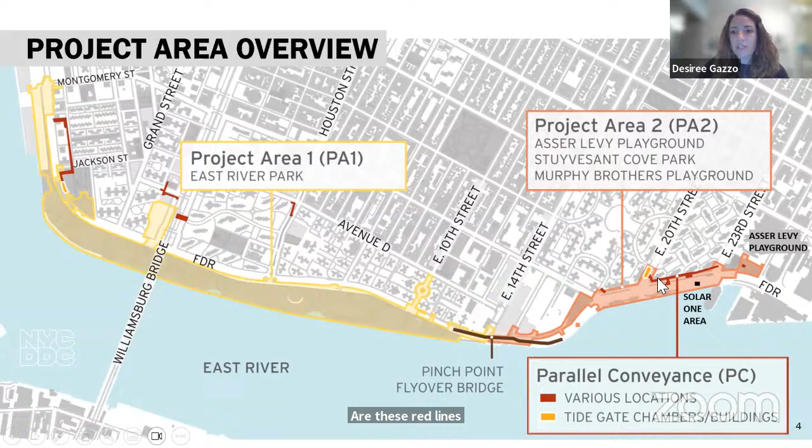Really quickly, because we might have some new folks in the room: the Eastside Coastal Resiliency Project is broken out into 3 projects. Project Area 1 is south of East 14th Street to Montgomery Street. Project Area 2, which CB6 lies in, is north of East 14th Street to about East 25th Street, and has Murphy Brothers Playground, Stuyvesant Cove Park, and Asser Levy Playground. Parallel conveyance are these red lines that run through the entirety of the project, which we'll talk about a little bit later.

So for an overview of the 3 contracts, this is our typical slide that we show here. For Project Area 1, the East River Park is closed south of Houston Street. There's a greenway closure to East 10th Street, north to East 10th Street, and a portion of Corlears Hook Park is closed. The Corlears Hook pedestrian bridge is currently closed with the temporary bridge open, but the new Corlears Hook bridge is being assembled on site. And we just opened the Delancey Street Bridge on September 2nd.

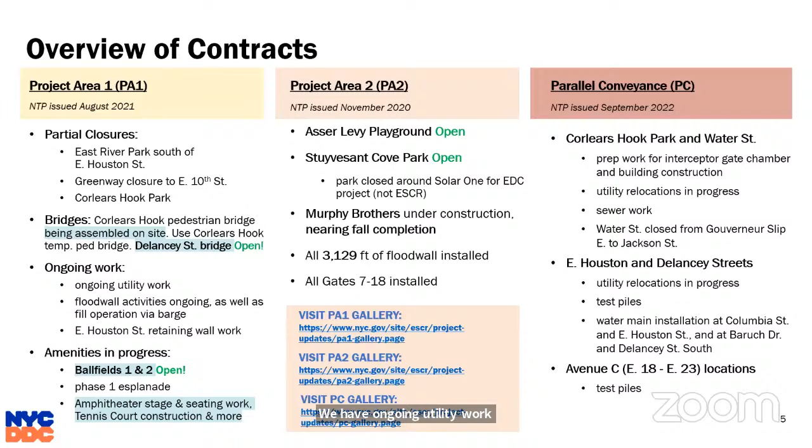We have ongoing utility work, floodwall activity work, demolition of the Esplanade and reconstruction. There's a lot of construction work happening, and then we're working to bring back a lot of new amenities. So ball fields 1 and 2, right by the Delancey Street Bridge, opened on September 2nd as well, and that's available for open play as long as there's not a permitted team there.

Currently, that is the only location that the Delancey Street Bridge goes to, so you can cross the bridge, go to the ball fields, and then you'd have to cross the bridge back out. It doesn't connect to any other outlets. We're making great progress on the amphitheater, tennis court construction, multi-use field, and more.

For Project Area 2, which you're very familiar with, Asser Levy Playground has been open. Stuyvesant Cove Park is open except for the area near Solar One where the EDC construction is. Murphy Brothers Playground, we're expecting to open in October, so we're really excited that we're delivering this project on time.

3,129 feet of flood wall has been installed, and all gates, numbered 7 through 18, have also been installed. I put the links to our gallery, our construction galleries, here. We are still in the process of updating them, so you could wait a week or so to look at them and we'll have new pictures up.

For parallel conveyance, we've broken it up into a couple of different locations. For Corlears Hook Park and Water Street area, there's a lot of prep work for the interceptor gate chamber, which we'll talk about in a couple of slides. There's also a lot of utility relocations and sewer work, especially on Water Street between Gouverneur Slip East to Jackson Street. Houston Street and Delancey Street have similar utility relocations, test piles, and water main installation. That is the bulk of this project.

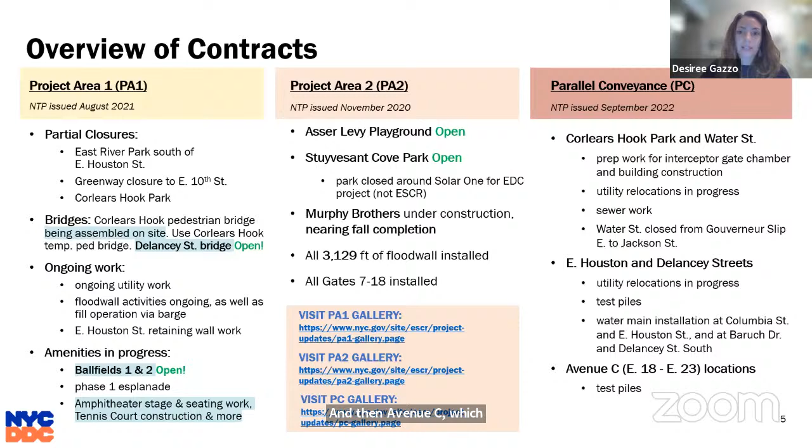Very quickly for Project Area 1, again, this is our typical slide, so it'll be up on our website if you want to go back and look at it in more detail. But it really speaks to the items that I mentioned on the previous slide.

Here at number 7 is where the Delancey Street Bridge opened, and then there's the access to ball fields 1 and 2. The northern portion of the park that connects past the Con Ed facility to Stuyvesant Cove Park is still open right now, and there is some work happening on East 10th Street. We're about to do some micro tunneling under the FDR, but then a good portion of this section of the park is closed.

Pier 42 did open in full, so that is a new resource now for the southern portion of the park.

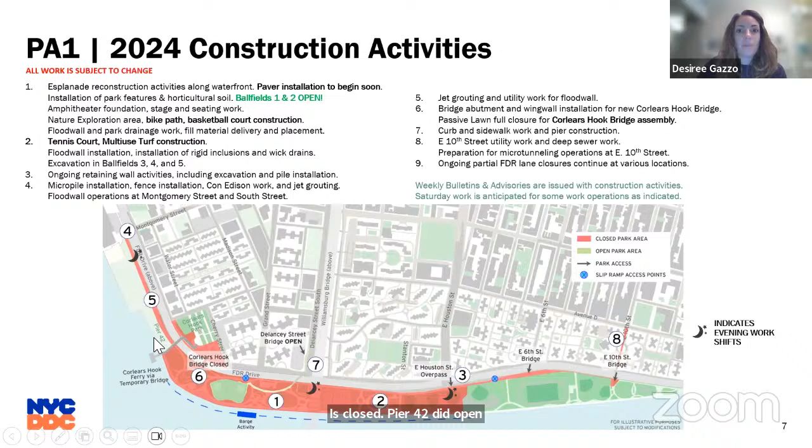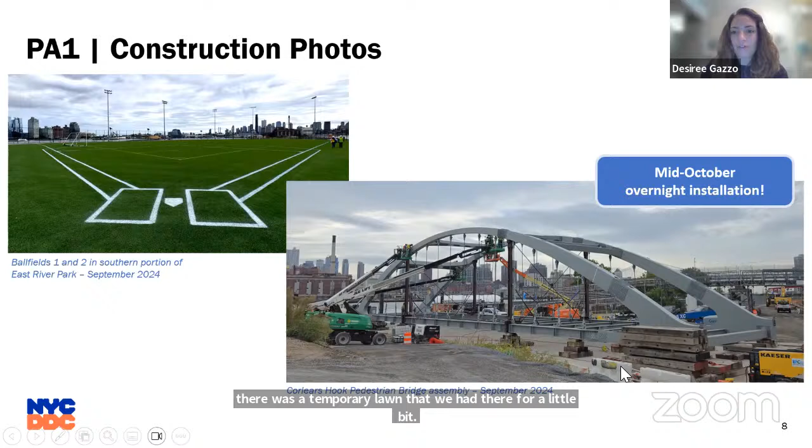At the top left is a photo of ball fields 1 and 2 when it had opened. In the bottom right is the Corlears Hook Bridge assembly, being assembled on site at East River Park, around where the compost facility used to be and where we had a temporary lawn for a while. That's now the staging area — it was for the Delancey Street Bridge, and now it's for the Corlears Hook Bridge.

We've been getting some questions about when the future amenities are going to open, and we're looking to put out a schedule as soon as we get a better idea of that.

For East 10th Street, again, we are doing ongoing improvements to sidewalks and detour areas. We've received several questions about that pinch point area around Con Ed, and we expect a timeline for that procurement process to be developed in the months ahead. We will come back with that information once we have a better timeline.

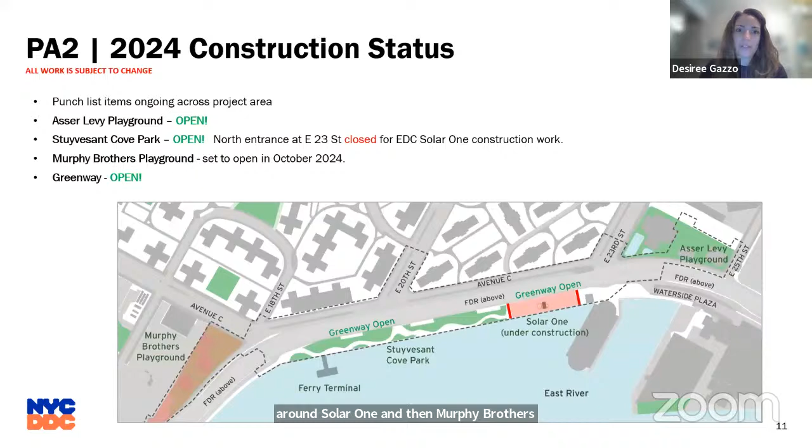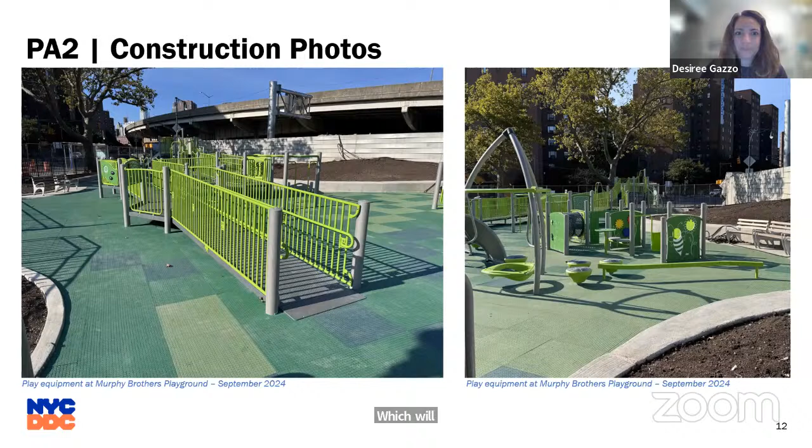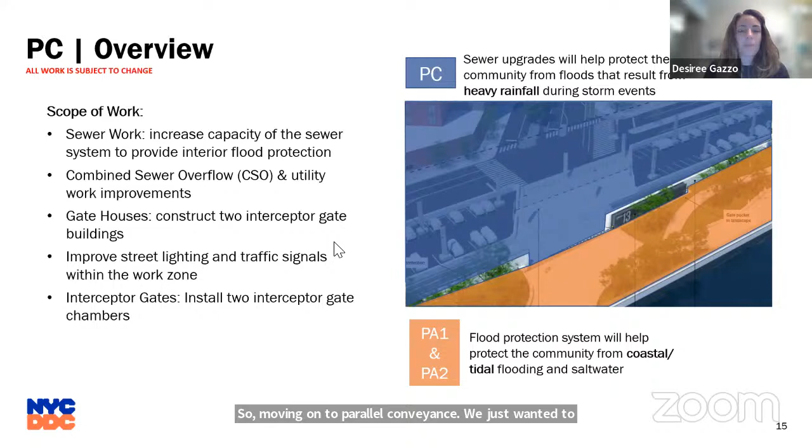Moving on to parallel conveyance, we wanted to give a quick overview of what the parallel conveyance system is. Project Area 1 and Project Area 2 are shown in orange here, on the water side of the flood walls and floodgates. This flood protection system will help protect the community from coastal and tidal flooding and salt water — this is when the storm surge comes and pushes up on the river and against the shore. Project Area 1 and Project Area 2 will help protect the community from that tidal flooding.

Parallel conveyance is the sewer upgrades, which will help protect the community from flooding that results from heavy rainfall during storm events. The parallel conveyance work increases the capacity of the sewer system to provide interior flood protection, shown in the blue area here. It's combined sewer overflow and utility work improvements. There are 2 gatehouses, the interceptor gate buildings, and improvements to street lighting and traffic signals within the work zone. There are also 2 interceptor gate chambers, which will effectively close off your drainage area, so it will only take in drainage and stormwater from within your area, so the capacity doesn't get overburdened.

Can I ask for clarification? The idea there is that it will close it off so that seawater doesn't come flooding in from the riverside? Well, is it okay if I answer questions now? Sure, go for it. Oh, okay, great — I know all community boards work differently, some wait till the end. Okay, that's fine, that's great.

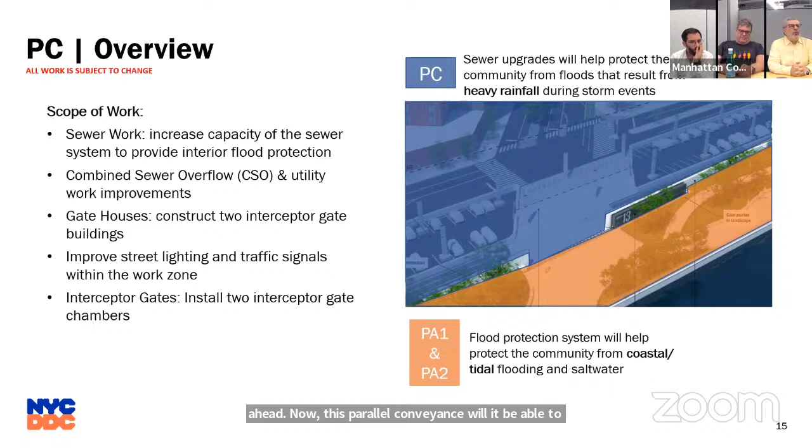The flood wall? Yes. So the interceptor gate chambers, normally, if it rains, it will still hold capacity. The interceptor gate chambers, similar to the flood gates, would need to be closed in a time of storm or severe flood. So they do operate and work together, but could also function to some extent separately.

The extra capacity will always be there regardless of whether or not the floodgates are closed. So in the event of a heavy downpour that is a flash flood, it would assist. Yes, correct.

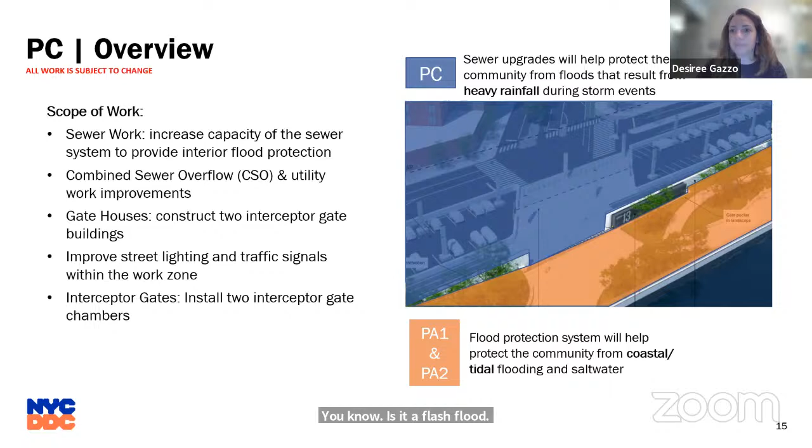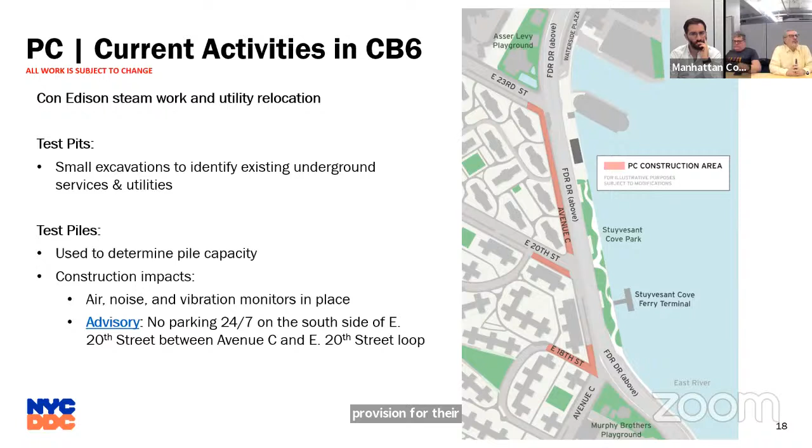Yes, and as we have with other projects, if a flagger is necessary to assist in that, we will certainly arrange that. From our experience with Project Area 2, so many of these intersections are very heavily trafficked by cars coming on and off the FDR. And then you have pedestrian crossings of all the folks who want to get across to the park, plus the bike lane and the buses.

So in this little stretch here, y'all have so much going on. We'll be sure to work with you, again, given the multimodal area that this is. But yes, it's great that you're stating your concerns ahead of time so that way we can make sure we're on top of it.

So then the test piles - the piles have to go in to help support the utilities and the excavation as we do the work that needs to be done. Before the contractor does the final piles, they do a series of test piles to determine the pile capacity and the conditions of the area. It's for multiple reasons, and it's great that they're doing the test pits and test piles before they just start the final construction work. We have to make sure everything is checked and balanced before we go ahead.

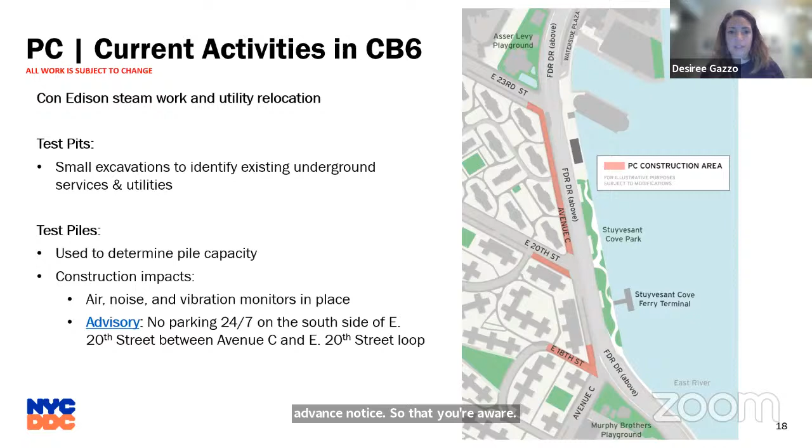And then the sequence of pile work again, which I briefly went over - this gets into a bit more detail. There are two types of test piles: helical piles and micro piles. Depending on the conditions and locations, the helical piles take approximately 1 hour to install, with load tests following 1 to 2 days later.

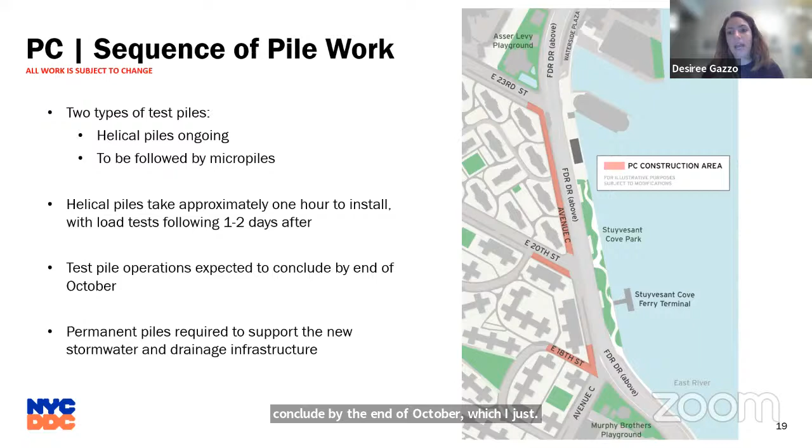Again, that's the main purpose of these test piles - to do the load tests, because they're going to be supporting some of the utilities. The test pile operations are expected to conclude by the end of October. Permanent piles are required to support the new stormwater and drainage infrastructure, so they're very, very important.

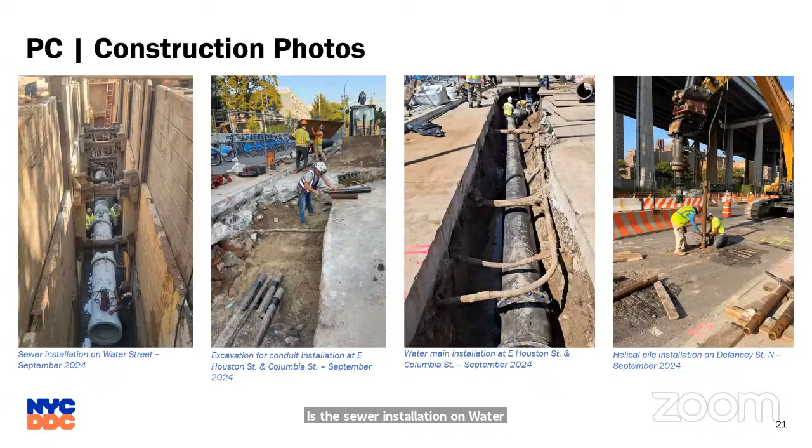On the left-hand side is the sewer installation on Water Street, and you can see how deep that sewer system goes. So again, it's really important to get all the utilities out of the way to be able to go down, and they really used the minimum footprint they could here, to try not to impact too much area.

This is excavation for conduit installation at East Houston Street and Columbia. Water main installation, which you can see the difference in depth, much closer to the surface than the sewer, which is much deeper. And this is a helical pile installation on Delancey Street in September. They've been doing a lot of this work already in the southern portion of the project, and now we're moving up to the northern portion. It's great that we have photos to show exactly what it's going to look like.

So again, these are resources for the community. We have our website, where we post the bulletin distributed every Friday. If you're not signed up to receive it, please reach out to our construction liaison, Tannia - her number and email are here. She is our day-to-day liaison with the community. I'm available as well, but Tannia works directly with the PMCM team leading the parallel conveyance project. We're at the CB3 Parks meetings, and now we will be at CB6 again, which we're very happy about.

We have the inquiry tool on our contact page on the website, and you can feel free to submit questions there at any time, and we have a team to answer them. On the right-hand side are some of the community advisories we post in the area - we post them in Spanish, Chinese, and English. We will continue to come to CB6 either when we have updates or as you invite us back, should you have questions outside of our updates. This is just the Eastside Coastal Resiliency website, which has so much information on it.

And that's our presentation for tonight.

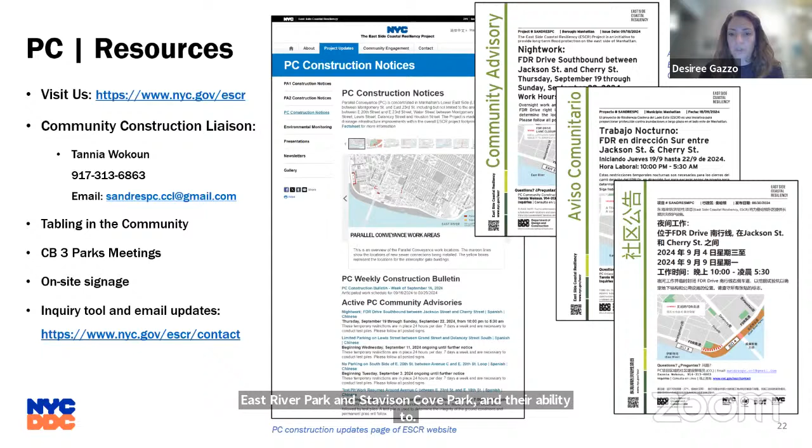So I think some of the parks that are able to use vegetation to really slow down and help with flooding perhaps have more land area, and perhaps the flooding wouldn't be as extreme. With East River Park, because that park is so heavily recreational, they needed to have the field as their primary use, and that's why they decided to raise it. But you can look through the Public Design Commission presentations, which talk about the different plant communities planned through East River Park and Stuyvesant Cove Park, and their ability to withstand coastal flooding more so than some of the plant materials that, especially in East River Park, were not able to as much. I hope that helps.

Hi Desiree, this is Tanya Arias, spelled with one N, not two N's, like your Tannia. I'm new to this, so I'm sorry if you already answered this question. What is the timeline of the project and how are you doing on the schedule? Are you within the schedule? What is the timeline? When is it expected to be completed? And how is it going?

Yeah, and I apologize for not bringing up the full timeline. The timeline for parallel conveyance is 2026, so by the end of 2026 that project is expected to be completed, and we are on schedule for that. For project area 2, which was Asser Levy, Murphy Brothers, and Stuyvesant Cove Park, that was expected to be completed the end of this year, and we are on schedule for that, again with Murphy Brothers opening next month. And then for project area 1, that is scheduled to be completed in 2026 as well.

Thank you. Got it. Thank you very much. Victoria then. Hi, Desiree, how are you? This is Victoria Benatar, back here.

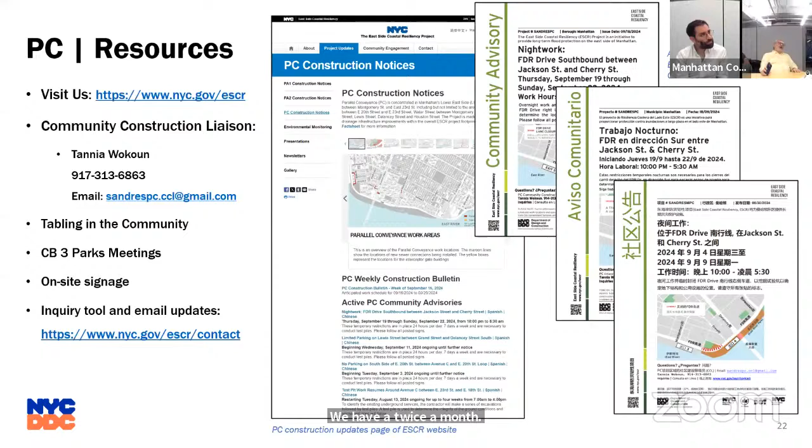When we have, twice a month, the water go over the bulkhead, is there going to be any kind of protocol invoked, closing the ferry landing for example, because it is no higher than that bulkhead, closing the floodgates to protect the surrounding community, or is it just expected that that water would flow into the parallel conveyance?

Sure. So DEP Coastal Resiliency Bureau could probably shed a bit more information on what would trigger the closure of the floodgate. I believe, how we received that New York City alert from the other day that there might be high tides due to the full moon, etc.

I think if they felt that the impact of whatever weather was forecasted, again, even if it was just from a big moon and the way the tides are working, they would have to make that call with the city and emergency management, if it was impactful enough to warrant the closure of the gates to protect the community. But again, that's what the gates and the wall are for, to protect from that surge.

So again, I would imagine that if some sort of weather or environmental event were to happen that wasn't like a hurricane or a superstorm, they would be able to close that system down to protect the community, that's the point of it. But I would say those types of questions would be better directed to the people who will be operating it, which is the DEP Coastal Resiliency team.

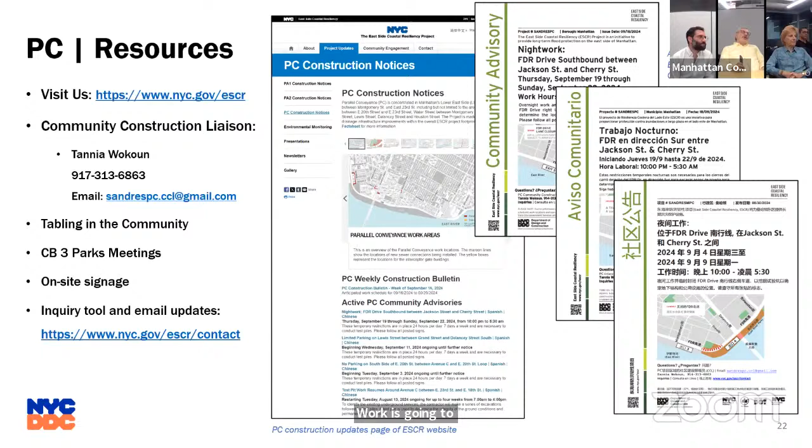One last question, you promise? You haven't mentioned when work is going to begin on raising the park south of 14th Street. I assume we are vulnerable to water coming up through there until that is built.

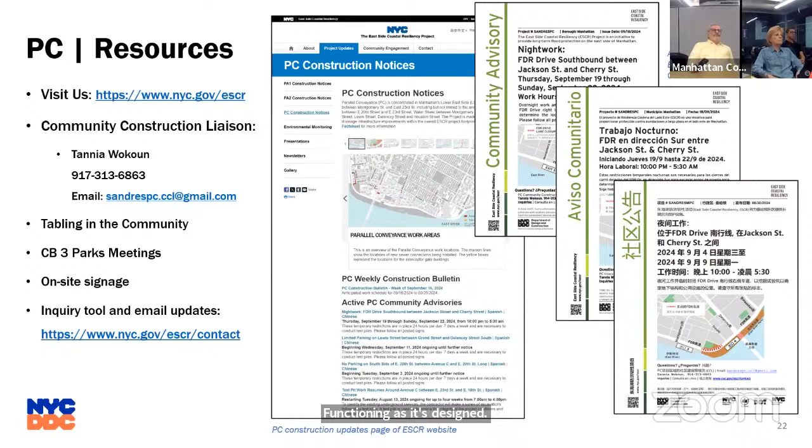Technically, Project Area 1 and Project Area 2 are one ESCR system, so the entirety of the flood protection needs to be built for the East Side Coastal Resiliency Project for everything to be functioning as it's designed. So by 2026, then the full system will be operational.

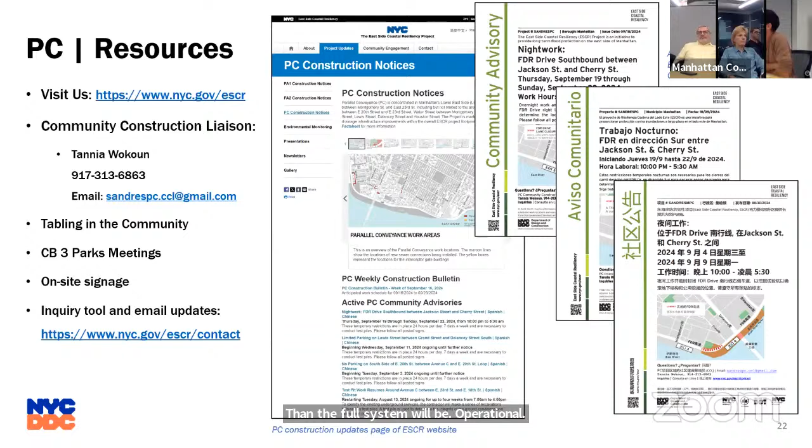I just have a question about that structure you showed that was 4 stories below ground. If you can go back to that slide. Where would employees of these structures access these? Would they be through publicly accessible sewer grates or manhole covers? Are there permanent structures being constructed?

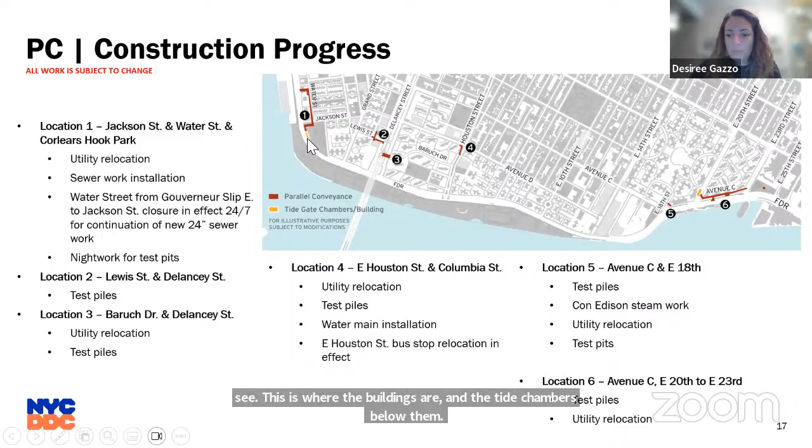I believe the access is through the building, but I need to confirm, because on the drawings here you'll see this is where the buildings are and the tide gate chamber is below them. But to be completely certain that the building is directly on top of this, I would need to verify that. They are very much tied together.

Ethan, if you have access to the chat and want to drop the 2 Public Design Commission presentations in the chat, that would be great. It goes into the materiality of the buildings - they have these glass tiles that were very specifically designed for this project. They might offer more sections on the relationship between the building and where the chamber sits as well. I apologize, I don't know the specifics on that.

They did present that a while back, and that ladder staircase connects to a door at the top of that building. Yeah, it does. I just needed to confirm if it's directly underneath it or off to the side. So yes, it should be right underneath the building, and you could see the ladder and the staircase there, and then what would be a hatchway door.

Great, thanks. I'm going to group a few questions. Some were answered already, but there are repeated questions about the issue of graffiti - I think this is more about vandalism than graffiti. First, when is the plastic sheeting coming down? That already has a lot of vandalism on it. And related to it, how will the structure you're showing on the screen now also be protected from being tagged?

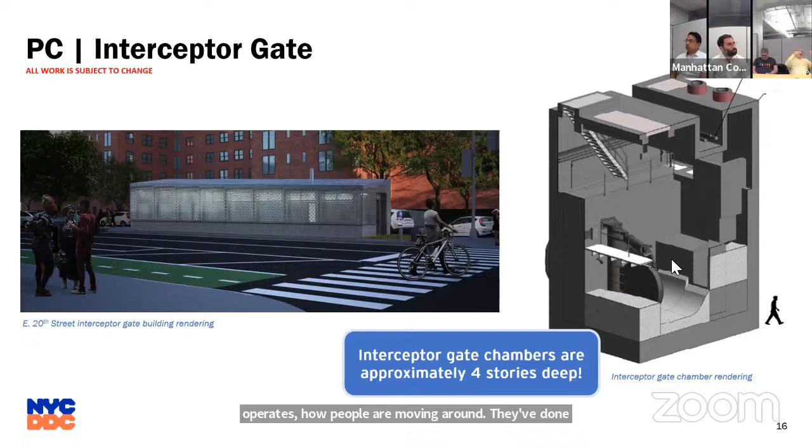Very specifically, it's the area right next to the gas station. Mm-hmm, yeah.

Okay, in the interest of time, seeing no more questions, I'm going to move us on. Thank you so much, Desiree. It would be great if you can come back next month with updates, especially on the outstanding items, whether there's funding earmarked for the pinch point, the issue of anti-vandalism treatment, the issue of deploying the gates, whether they're operable, and a few other questions that came up. So if we can have answers by next month, that would be amazing.

Okay, great, and we did get an answer on the money. There is money allocated for the pinch point. Is there an amount that's made public? I will come back with that, but there is money allocated. Okay, that's great, thank you so much. Appreciate it, great, thank you.

Have a great night. And perhaps I'll come in person. I apologize I couldn't be there in person tonight. No worries, you're welcome to. Thank you, good night. Good night, good night.

All right, moving us to the next topic we have. It's a discussion of a request to install a self-cleaning restroom near Stuyvesant Cove Park. And I believe Dina is here to talk about it. Hi, Dina. Hi, Candace and I are both here. Candace is the park manager for the park. Hi, Candace, welcome. Both of us work for Solar One.

So I'm not even sure how to begin this, but essentially people may be aware that we maintain two porta-johns at the 20th Street entrance of the park, purely to lessen the frequency of people using the park itself as a restroom, because the restrooms at Murphy Brothers and Asser Levy close at 6. At Asser Levy you need an ID to enter and use their restroom. At nighttime, there are often people that have pressing gastrointestinal needs, and to make things more tolerable for the park staff, we maintain those restrooms.

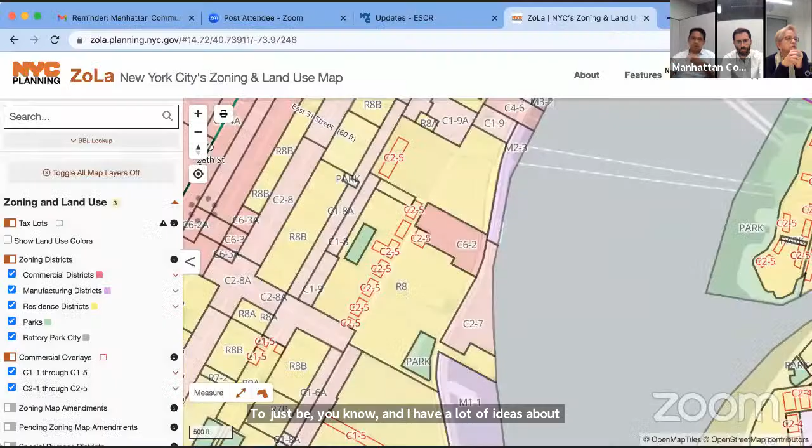I agree that it should just be green space, greenery, because there's not really a place in the community to just be. I have a lot of ideas about pickleball courts and different activities, but if someone's not doing that, then they're excluded from using that space. There really aren't any places to just be and watch the sunrise, let's say.

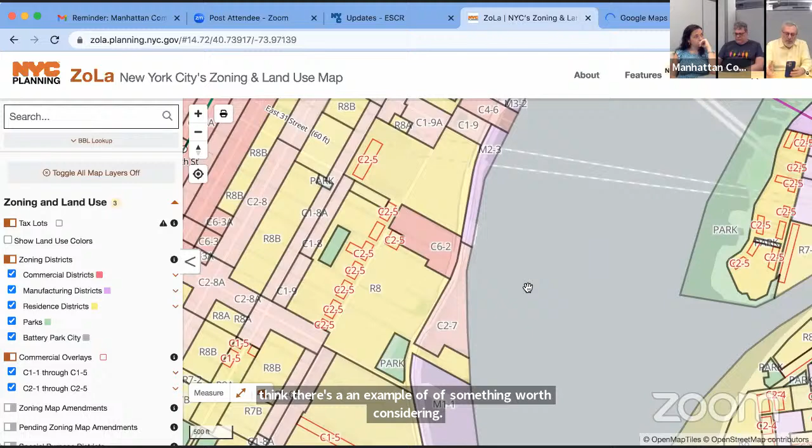Larry? I think there's an example worth considering along those lines, dubbed the Manhattan Healing Forest. It's actually on Roosevelt Island, featuring 1,000 different native plants in an area of only 2,700 square feet, sort of like a mini forest.

And since we have this next to the Greenway, it would be a perfect location to perhaps replicate that right here on the real Manhattan Island. I've been in that Roosevelt Garden, it's beautiful with the green space. Right, and it's based upon something that they do in Japan.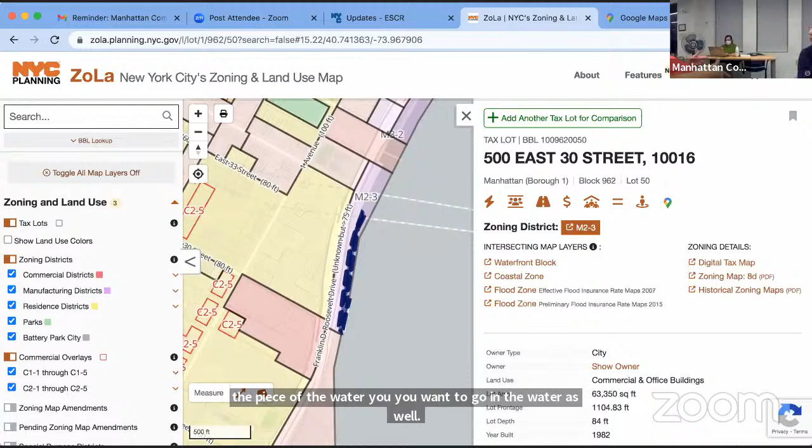That's possible, because it's narrow. The length is good—what is it, 200 yards? 600 feet, so it's about 200 yards, roughly. If it's 50 feet, if you could extend out to the East River, especially at the narrow points, you might have a decent size, because the hardest thing to find in this community district is play space, fields, playing fields. You've got the Con Ed fields, but those are private anyway. We don't have that much in the way of public playing fields.

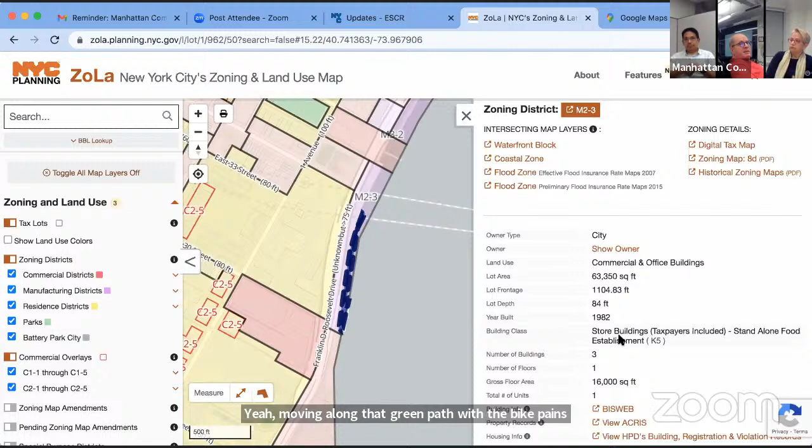In that 50 feet, people would still need to be moving through to get to the other side—moving along that green path, with the bike lanes and walking path having to be included in that 50 feet. That's an issue. If you look across the river at the Hunters Point Landing, they did a great job there, and this could be our response to that development.

It could be also a mixed use thing with an amphitheater in the greenery that can have events and people can see it. I think those are good ideas, but I don't think you have enough space for that, and also the cost of building out into the river is gonna be exorbitant. I think we should really be looking at what to do with the space right now - that could be a future project to build on top of, but I wouldn't want this to just sit around while we're trying to come up with ideas of expanding into the river.

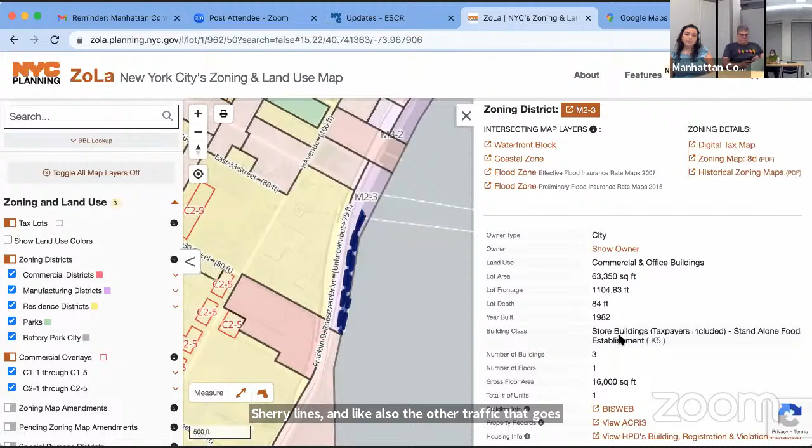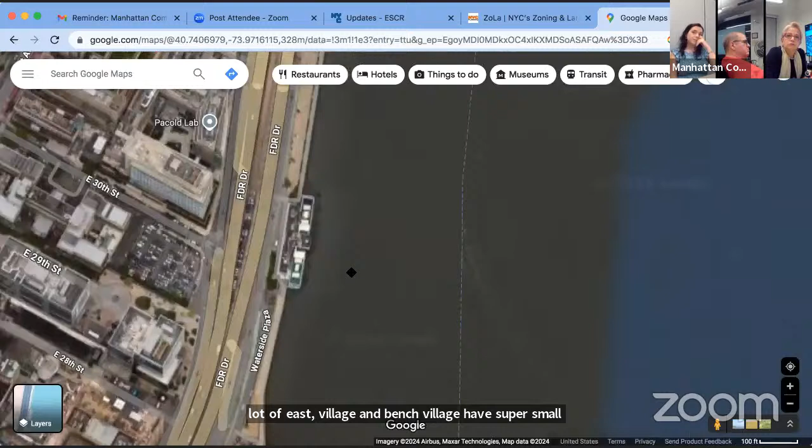Also, we have to look at ferry lines and the other traffic that goes through the river. But my idea was, in the same vein as what everyone else is saying, to have it be more of a community garden, where you still have a little bit of community involvement. A lot of East Village and Greenwich Village have super small spaces like this one you could use for that, and you could invite native wildlife as well for people to plant and stuff.

But what gets people involved in community gardens - sometimes it gets a little bit tricky. I lived in the East Village, in the middle of a lot of community gardens. There are some great ones and then there are some higgly-piggly ones, they get a little honky tonk. Some people take care of theirs and others don't, and it becomes an issue.

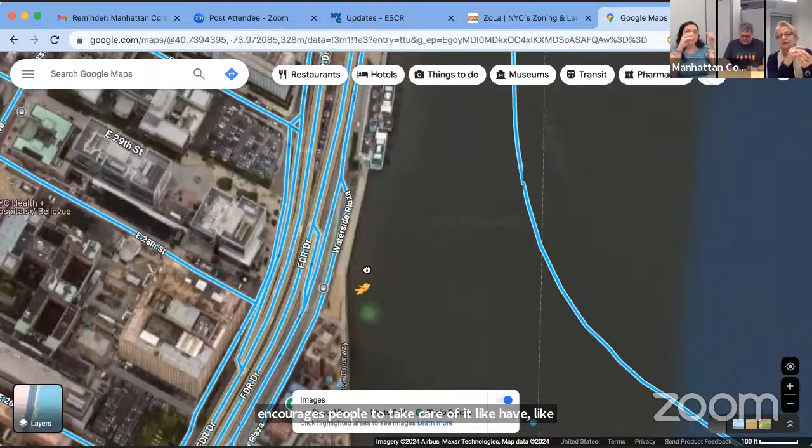I think that's part of it - we have to be a community that encourages people to take care of it. The Sutton Place area where I live is super small, and they do programming events to really try to get people involved. We don't have any greenery, ours is all brick terraces, really small strips, and part of it is if it's a little bit more hodgepodge and overgrown, that is our community also. We can't super manicure and landscape everything so it looks pristine and proper.

I think however people want their community garden to be, yes it should be well maintained and taken care of and not be a dump, but also a lot of the ones in East Village are in empty lots in between buildings. I think this will naturally look better and have more interest because it's on the waterfront.

Do you think we could stimulate composting, like having a compost station so people can come and start doing composting? That would also be a really good way to integrate people. Exactly - well, it's gonna be law now.

I have a question - what is the amount of income that the city is deriving now from the site? That's a good question, I don't think they have shared any numbers.

They've talked about - one idea floated for EDC was to maybe take over the parking and rent it to make some revenue off of it. That's something we are trying in the short term - they're saying this is like a short term fix while it's there. I think we should push back on that regardless of the dollar value they would share. Yeah, but I was just curious what that amount was, to know how vehemently they will argue. That's fair, just to see generally what we're up against.

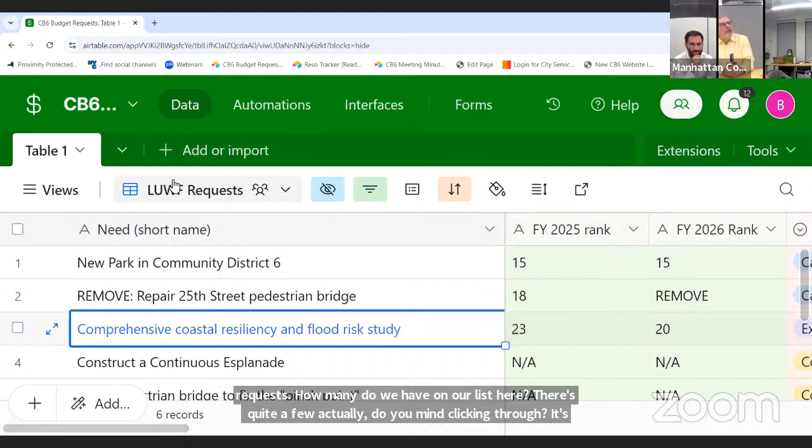So number 3, the comprehensive coastal resiliency and flood risk study. Why do we have that on? There were segments north of ESCR that have not gotten any analysis, including this stretch, I think 42nd coming down to where ESCR ends. That just was not received. And actually, we know for a fact from residents of the district, buildings along 38th, 37th, that stretch cannot even get insurance because a lot of these buildings are deemed too risky.

Senator? I actually had a silly question. So for the 25th Street Bridge, I haven't read it in a while. It says repair. Is this not a concern that, even if that new bridge does get built, whether or not it crosses over that exit area? Is there an exigent need to repair it in the interim?

That's a good question. Do we have emergency repair requests? Because they will continue to do that regardless. If it's in danger of collapse, that's a governmental study that has to be done. I don't think state DOT is waiting for this. They're not going to do anything to it, and they're not waiting on us to flag it. They will have to do their own inspections.

So what was the response for that one? So the response: more information agreement before making a funding decision. Oh no, this is not this one, sorry. On the bridge, the 25th Street Bridge - the agency's position supports projects included in a 10-year plan. Okay, so it's important, but not enough for right now. Got it, right.